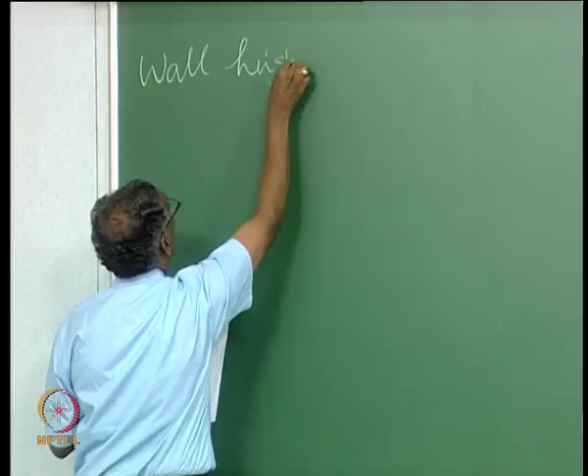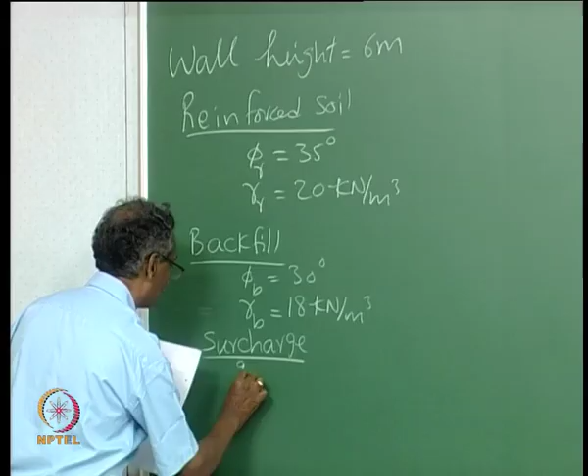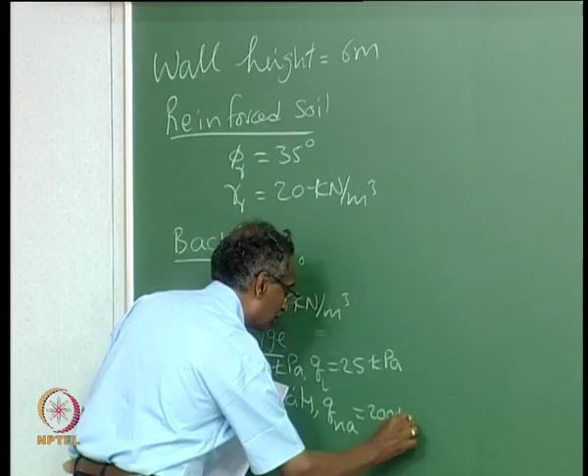Let us take a wall that is 6 meters high, and let us assume some soil properties like this: the reinforced soil has a friction angle of 35 degrees and unit weight of 20 kilonewtons per cubic meter, and the backfill has a friction angle of 30 degrees and unit weight of 18 kilonewtons per cubic meter.

The permanent surcharge or dead load surcharge is 15 kPa, and the live load surcharge is 25 kPa. Let us assume that the foundation soil has an allowable bearing pressure QNA of 200 kPa, and let us now go through some designs.

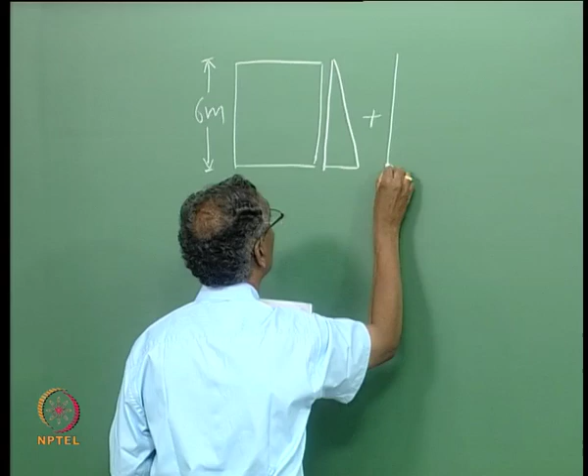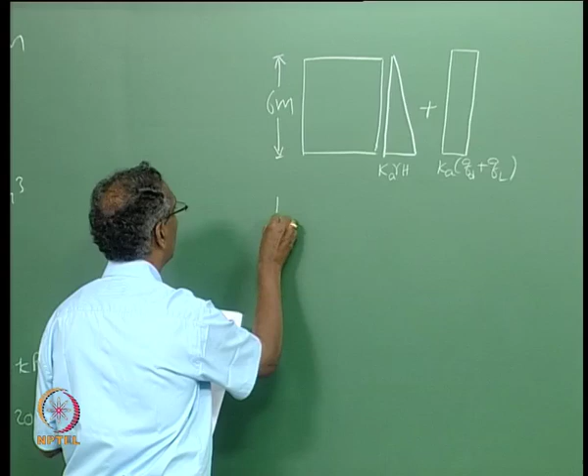As we have seen in the previous lectures, the effect of self weight is a triangular pressure distribution, that is Ka times gamma h, maximum at the bottom of the wall. The effect of surcharge loading is constant, giving a rectangular pressure distribution, and our Kab is 1 minus sin phi b by 1 plus sin phi b, which comes out as 1/3.

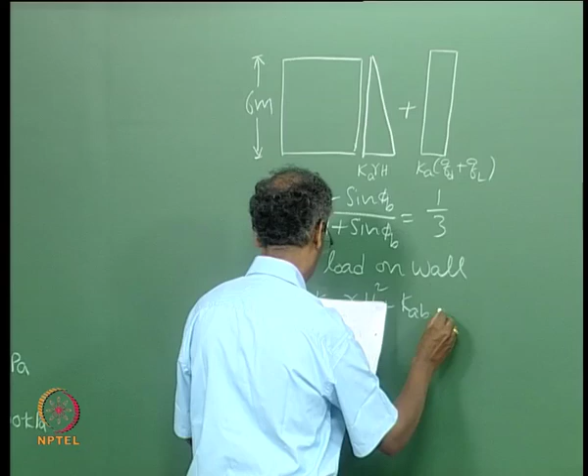So our active load on the wall PA is 1/2... and let us also include a lateral load acting at the top of the wall, which could be from a crash barrier. Let us assume that load is 25 kilonewtons per meter length. So our load is like this.

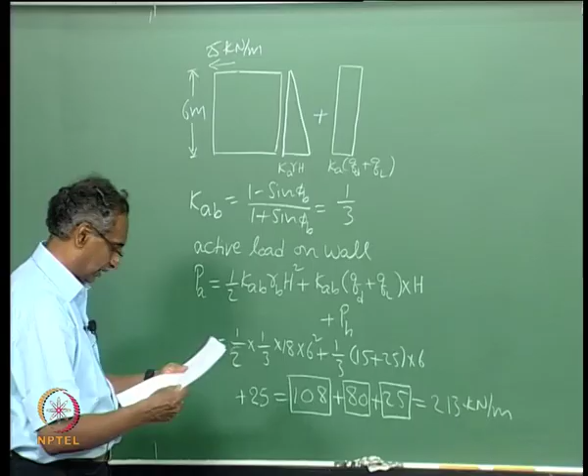So the lateral load on the wall because of the self weight of the soil is 108 kilonewtons per meter, and because of the dead load and live load surcharge is 80, and because of the traction forces we have 25 kilonewtons per meter. The net total of this is 213 kilonewtons per meter.

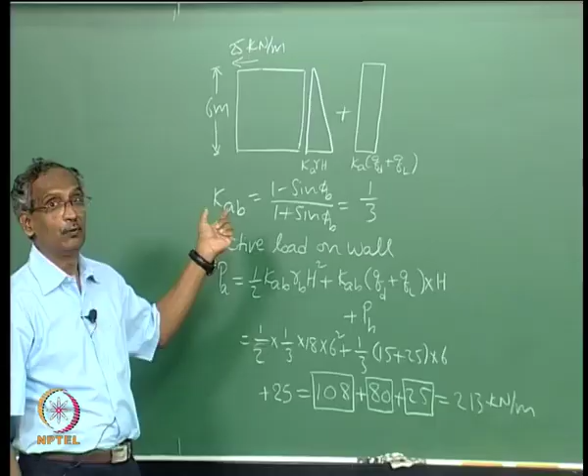Let us calculate the overturning moment. As we have seen, the self weight loading acts at a height of 1/3 of the wall height, whereas the uniform surcharge acts at a height of h by 2.

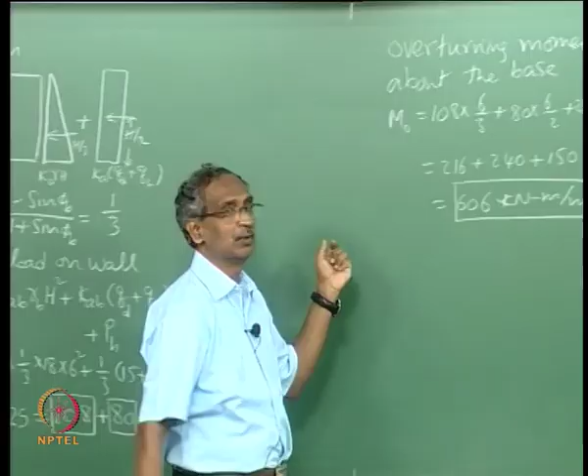So we can calculate the overturning moment as 108 times 6 by 3, plus 80 times 6 by 2, plus 25 times 6. So our overturning moment comes out as 606 kilonewton-meter per meter length of the wall, and the lateral force is 213 kilonewtons per meter.

Now the length of the reinforced block should be sufficient to counteract these lateral forces and the overturning moment with sufficient factor of safety, and let us see how we can do it.

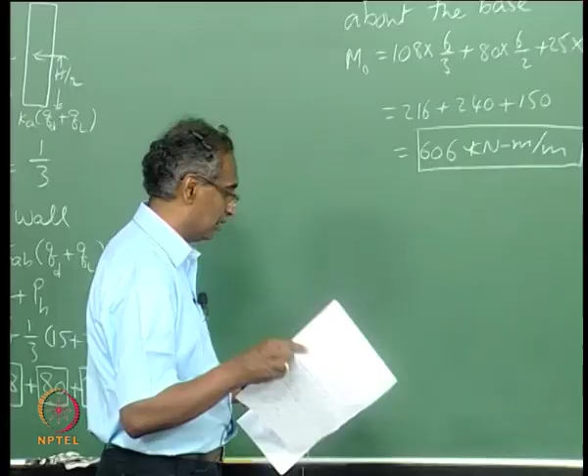It's actually a trial and error procedure, and let us start with a reinforced block length of 2/3 of the wall height, that is let us say 4 meters. Let us say that we take this length as 4 meters, and so our...

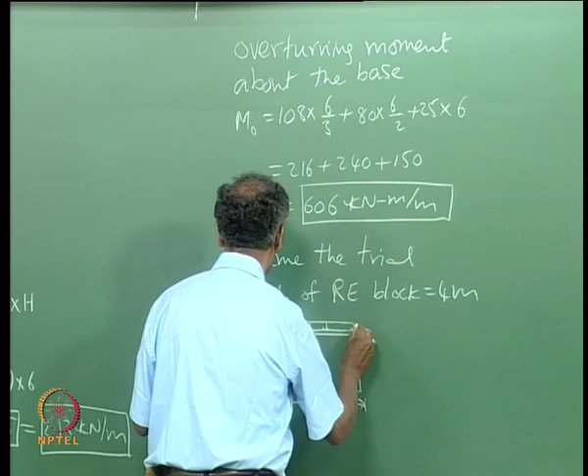For all the stability calculations we include the permanently acting loads, like for example here the dead load surcharge is 15 kPa, which we take as part of our stabilizing forces.

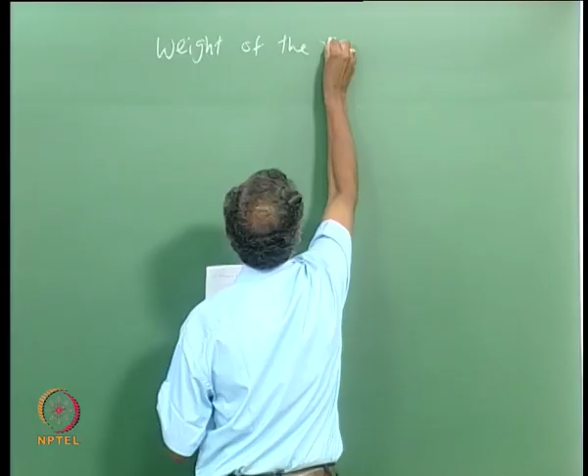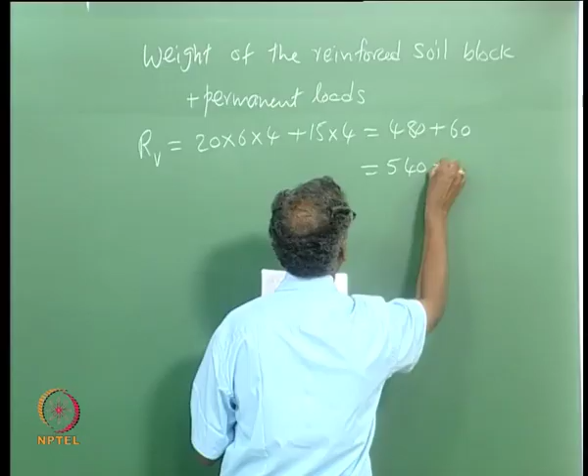So the weight of the reinforced block... the total vertical force is the sum of the weight of the reinforced soil block and the permanent loads. The unit weight of the reinforced soil fill is 20 kilonewtons per cubic meter, the height is 6 meters and the length of the block is 4 meters, and the permanent surcharge is 15 with the length of the block as 4. So our total vertical load is 540 kilonewtons per meter.

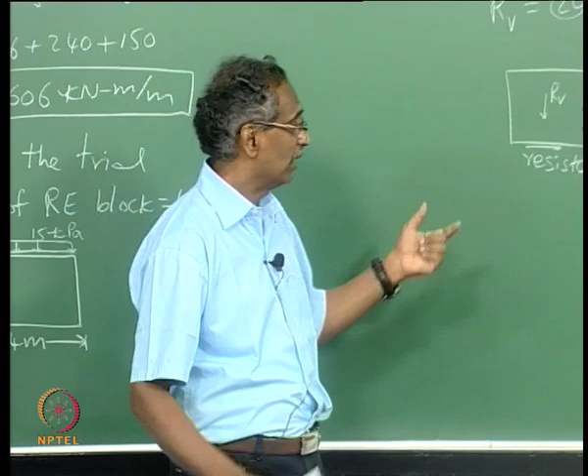Now let us estimate the shear force that is acting, so this is Pa, and the resistance. As we had discussed earlier, the resistance is either a function of the reinforced soil or the foundation soil, depending on whichever is more critical. But in this case, since we do not have data on the foundation soil, as a trial let us assume our mu, the friction factor, as tan of 2/3 of the friction angle of the reinforced fill.

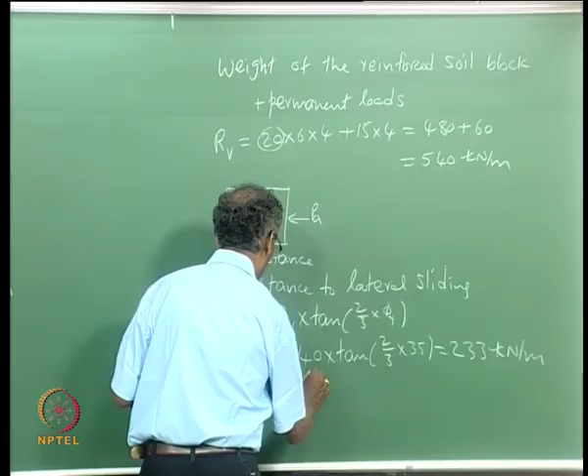So this resistance force comes out as 233 kilonewton per meter, and our factor of safety against lateral sliding is the resistance divided by the force. This factor of safety is coming out as 1.1, which is much less than 1.5. So this particular length of the reinforced block is too short, and it is not adequate to safely resist the lateral force.

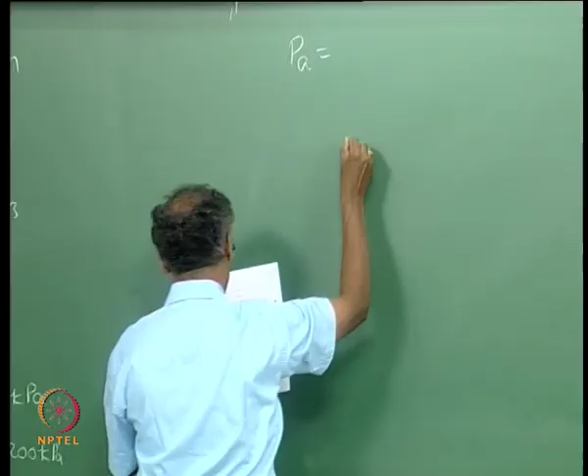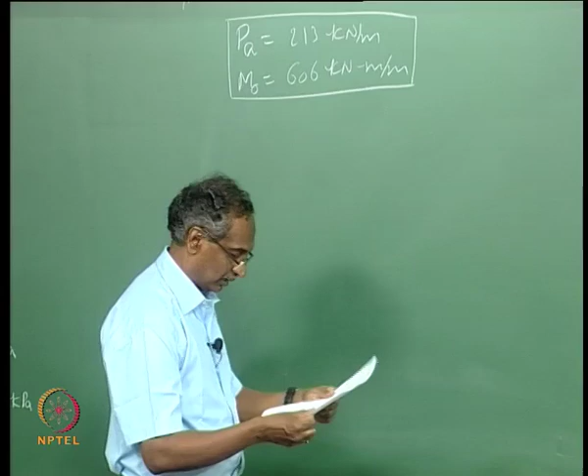So now let us increase the length to a higher value and do the calculations. Even when we increase the length of the block, because our height of the wall is constant at 6 meters, these upsetting forces will not change. Now let us write them separately, and now increase the length to 5 meters.

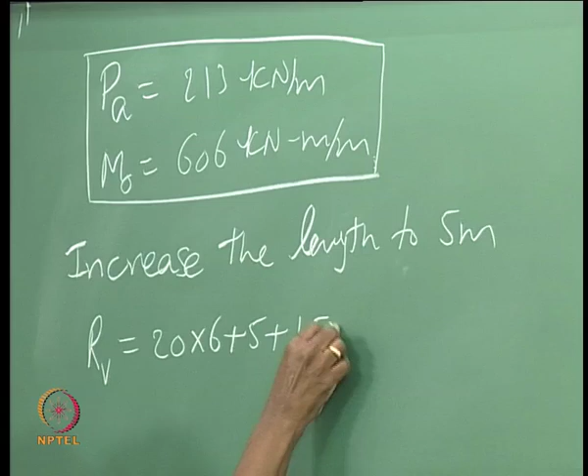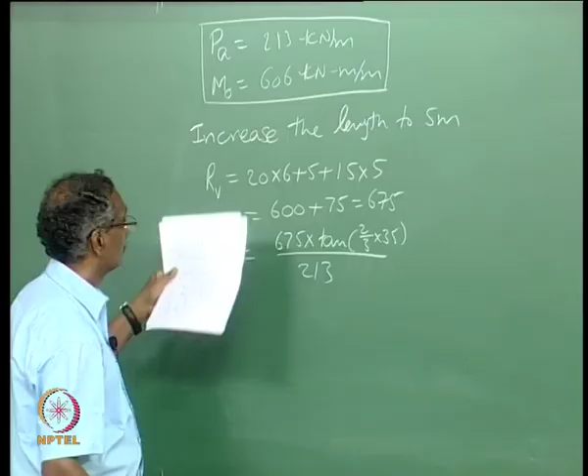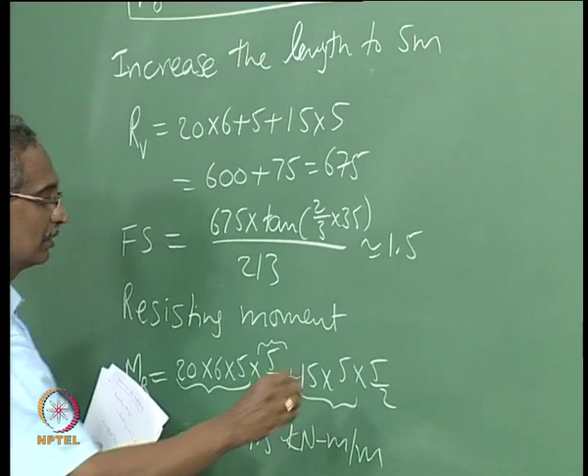So actually the resisting force is 20 times 6 times 5, where 5 is the length of the reinforced block, and this 5 by 2 is the lever arm, that is half the length of the reinforced block. And 15 times 5 is once again the resisting force, and 5 by 2 is the lever arm, and our resisting moment is 1687, and our factor of safety against overturning is 1687 divided by 606.

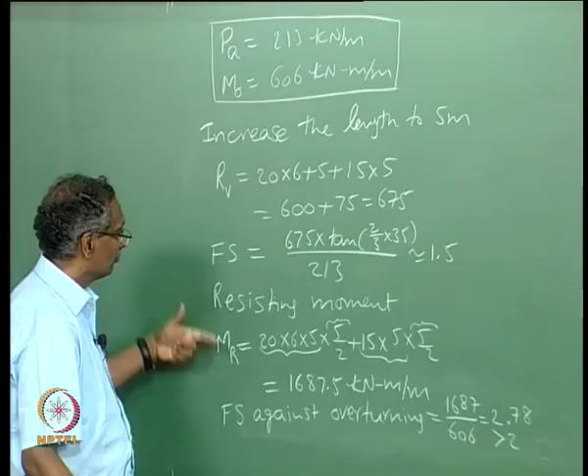And it comes out as 2.78, which is greater than 2. So this length of the reinforced block is adequate as far as resistance against lateral sliding is concerned, and also the resistance against overturning moment. Now let us calculate the bearing pressure.

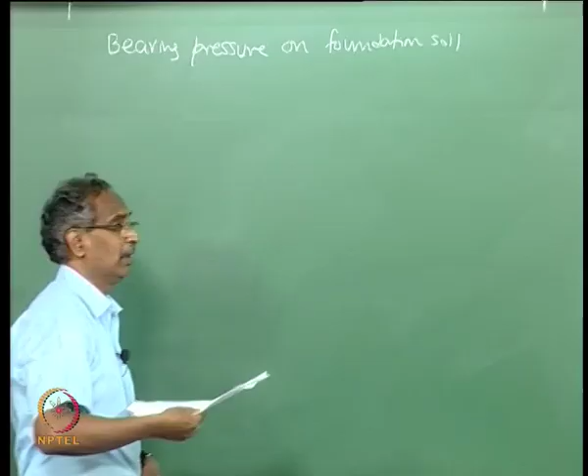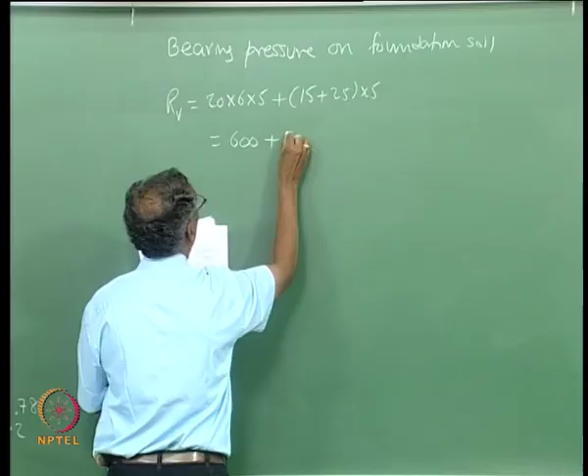And for calculating the bearing pressure, we include all the loads that are acting, including the live loads and the permanent loads and so on. So our RV in this case is 20 times 6 times 5 plus 15 plus 25 times 5, that is 600 plus 200, 800 kilonewtons per meter.

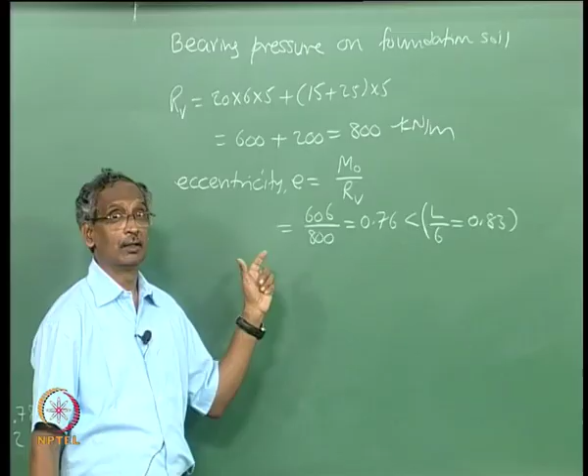And our eccentricity is m naught by RV, that is 606 divided by 800, that comes out as 0.76, and this is less than L by 6, that is 0.83. So actually our eccentricity should be within the middle third in the case of soils, and within 1/4 of the length in the case of rock foundations. So in this case our eccentricity is 0.76, which is less than 0.83.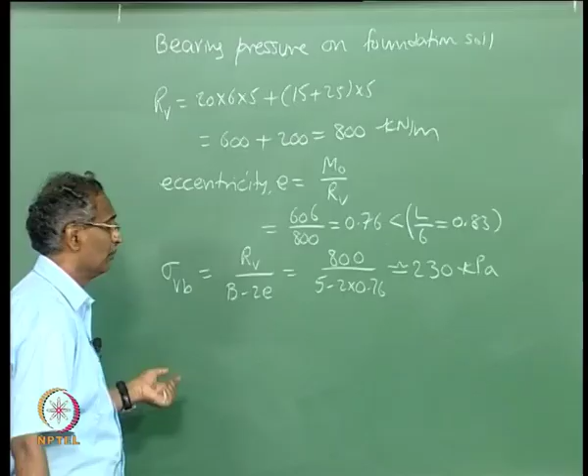So it is okay, and our sigma Vb is Rv by B minus 2E, that is 800 by... this comes to a bearing pressure of almost 230 kilopascals, which is more than the allowable bearing pressure of 200. So we will have to once again revise the length, so that our bearing pressure is also less than the bearing capacity. So now let us increase the length of the reinforced block to 6 meters.

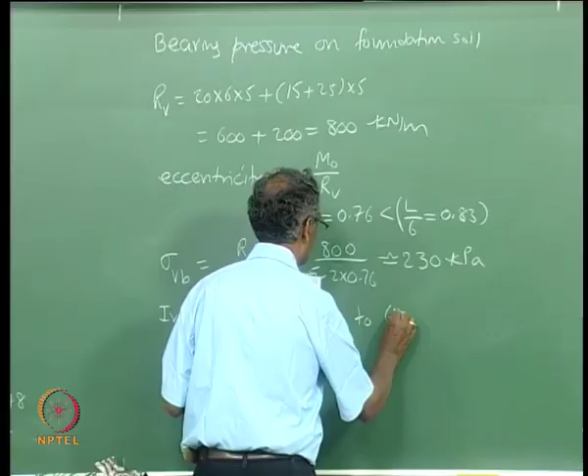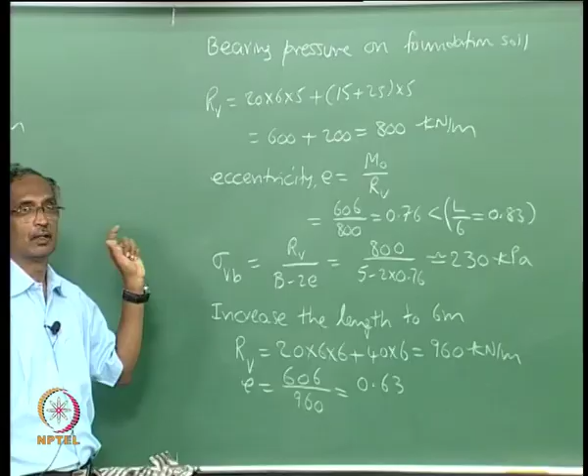So our RV comes to... So actually you notice that our eccentricity now is only 0.63 as compared to 0.76 when our reinforced block length was 5 meters, and that is because our overturning moment is remaining constant, the overturning moment of 606, whereas the weight of the reinforced block is increasing when we increase the length. So this is one way in which we can increase the stabilizing forces by increasing the length of the reinforcement.

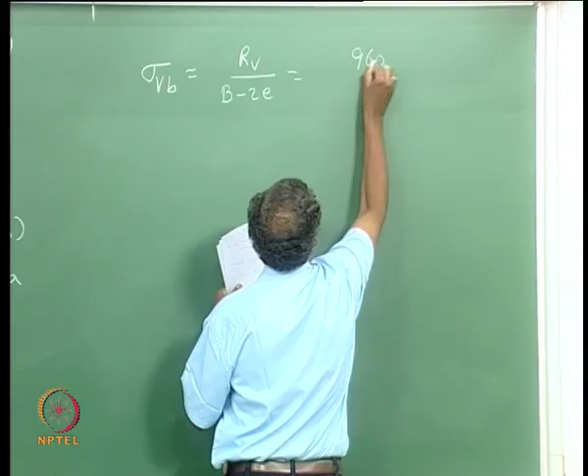So our eccentricity is now reduced to 0.63 and our sigma Vb is... so this bearing pressure comes to 202 kilopascals, which is very close to 200 kPa.

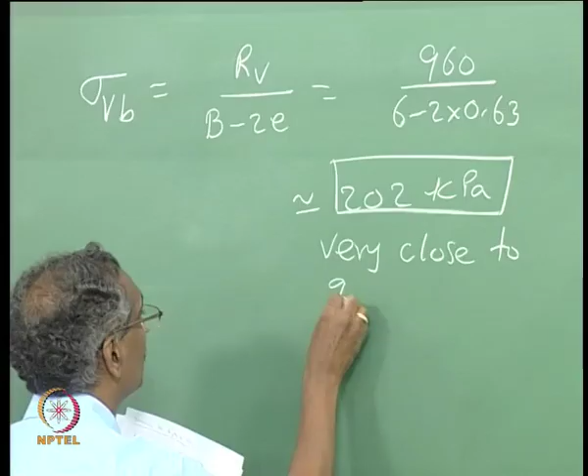So, we can just leave it like that, the 6 meters length of the reinforced block for this particular case, and this 6 meters length will satisfy all the requirements of the factor of safety against sliding. The factor of safety against sliding, and then the overturning, bearing capacity,

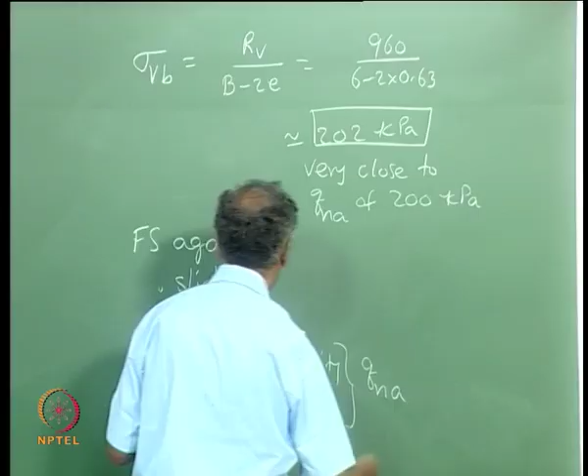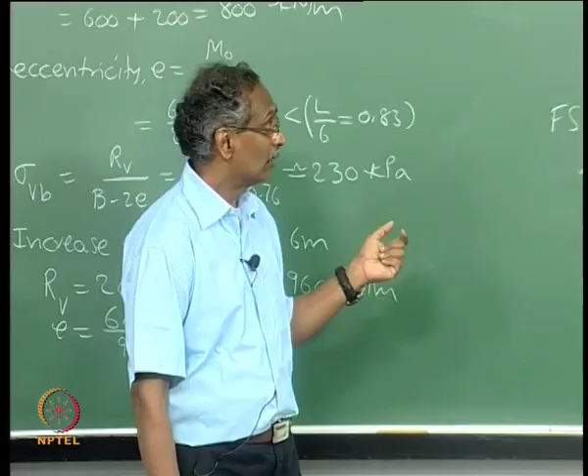and then the settlements. The factor of safety against sliding should be greater than 1.5 and the factor of safety against overturning should be greater than 2, and in this case we have achieved more than that, because our length of the reinforced block is increased just to satisfy the bearing pressure. So, our factor of safety against sliding would have gone up much beyond 1.5 and the overturning factor of safety would have gone to much more than 2, because our eccentricity has become very small, and the factor of safety against the bearing capacity and the settlements is satisfied by making sure that our bearing pressure is less than the allowable bearing pressure, that is the QNA.

So, this length of the reinforced block of 6 meters satisfies all the requirements from our design considerations. Okay. So, this completes the external stability analysis of this particular retaining wall, and the next step is to calculate the reinforcement spacing, that we will see in some other lecture, but let us slightly modify the problem with a sloped backfill and do the calculations.

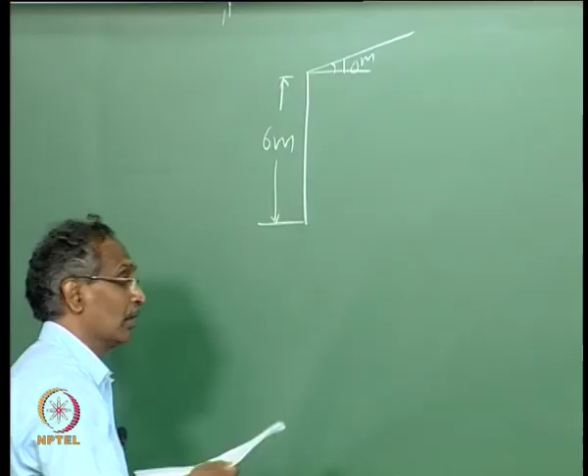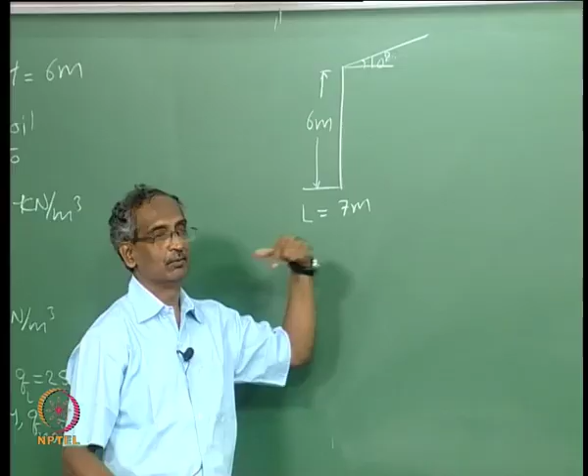Now, our backfill, let us say that it has a slope of 10 degrees, and let us assume the trial length as 7 meters, because we have earlier seen that we require 6 meters of length to satisfy all the requirements, and this wall as it has a backfill slope, let us assume slightly higher length of 7 meters, and so our reinforced block has 7 meters length like this,

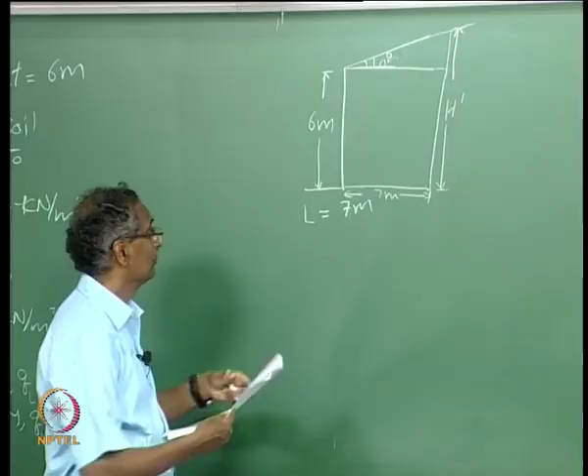and our H prime now, the height of the soil that our reinforced block should support is H prime, and our H prime is 6 plus 7 times tan 10 degrees, that is, and let us use the simple Rankine's formula for calculating the lateral earth pressures.

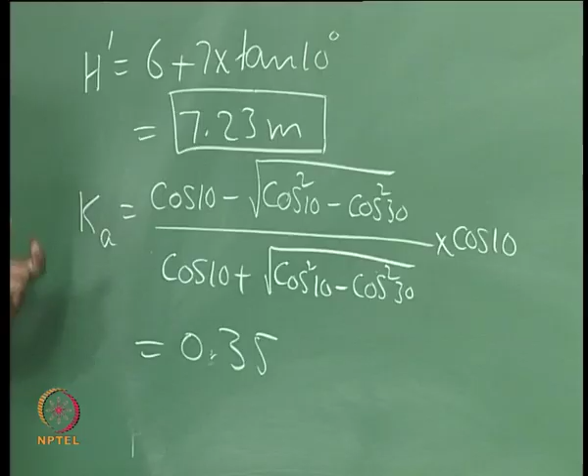So, if you apply the Rankine's formula, the Ka comes out as 0.35. In the earlier case, it was only 1/3, that is 0.33. In this case, because of the backfill slope, we have slightly higher lateral earth pressure constant. And now let us calculate the Pa as 1/2

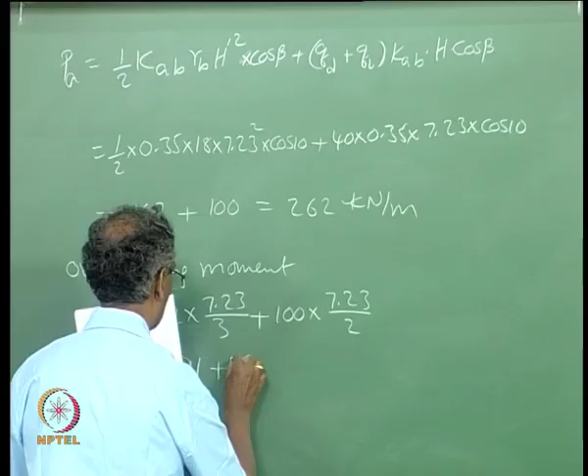So, this lateral force because of the self weight of the soil comes out as approximately 162, and the lateral force because of the live load and the dead load surcharge comes to nearly 100. So, the total lateral force is 262, and then the overturning moment m naught is 162 times... so our overturning moment now is 751, and if you compare this to the earlier one of 606, this is much higher, mainly because we have a sloping backfill.

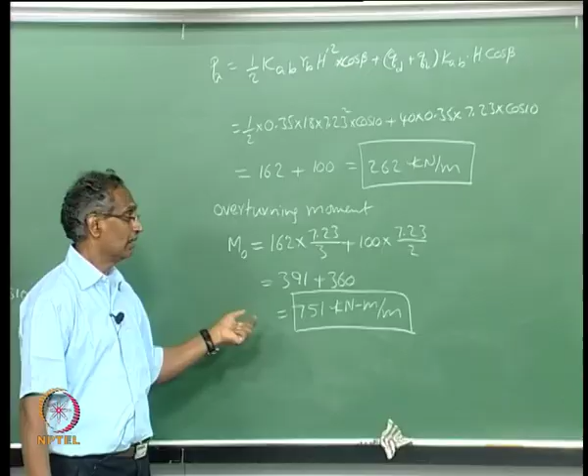So, because of that our K is high, and then the effective height of the soil that we need to support is much higher. Previously it was only 6 meters, now we need to support a height of 7 meters, 7.2 meters to be very precise.

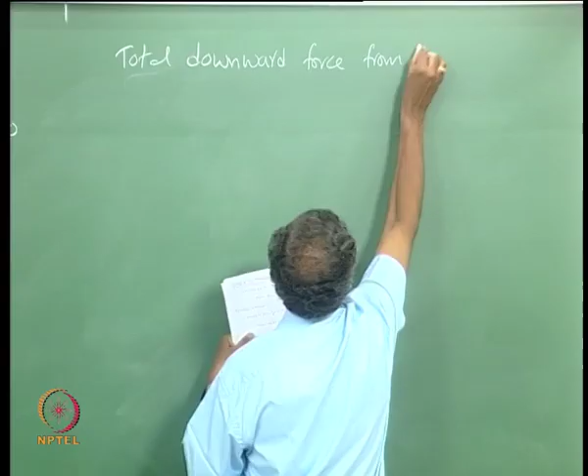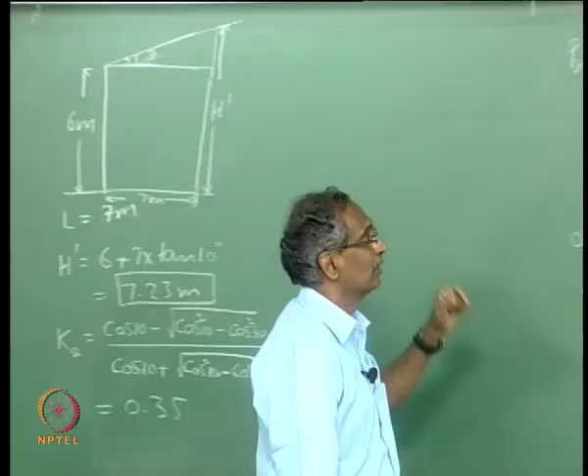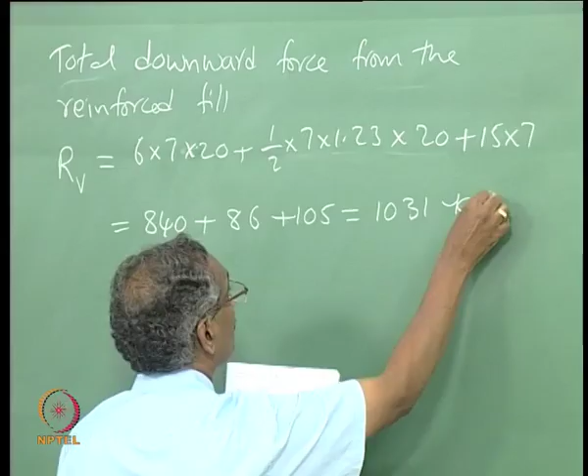So, now let us do the stability calculations. So, the total downward force is because of this rectangular portion plus the weight of the soil within that triangle, and then the permanent surcharge that is acting on top of the slope, and this force is the total downward force. So, it is 6 times 7 times 20 plus, and this comes out as 840 plus 86 plus 105, that is this total downward force is 1031 kilonewton per meter.

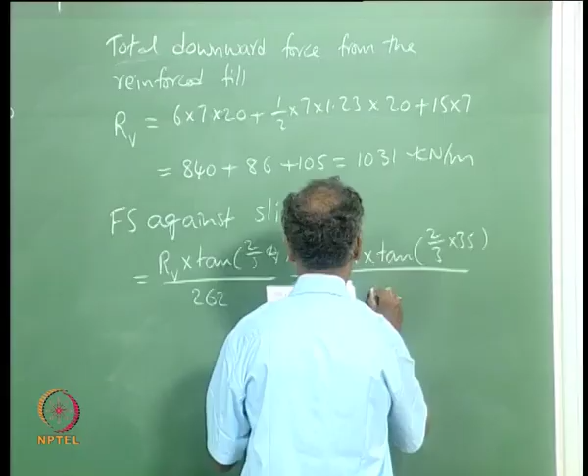The factor of safety against sliding... so, our factor of safety against sliding comes out as 1.7, which is more than 1.5. So, this length of the block is sufficient as far as the factor of safety against lateral sliding is concerned.

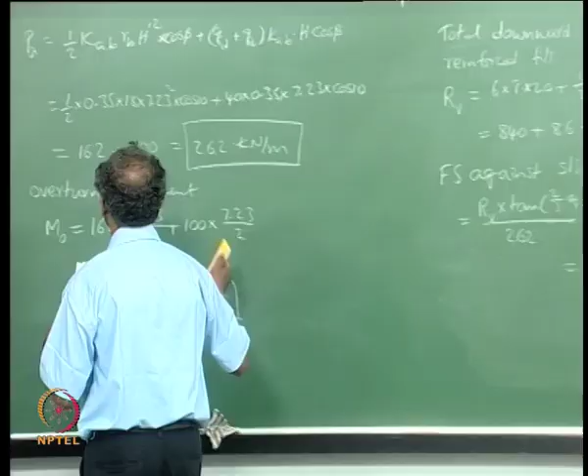And now, similarly, let us calculate the factor of safety against overturning. So, we have already calculated our PA as 262 and our overturning moment as 751.

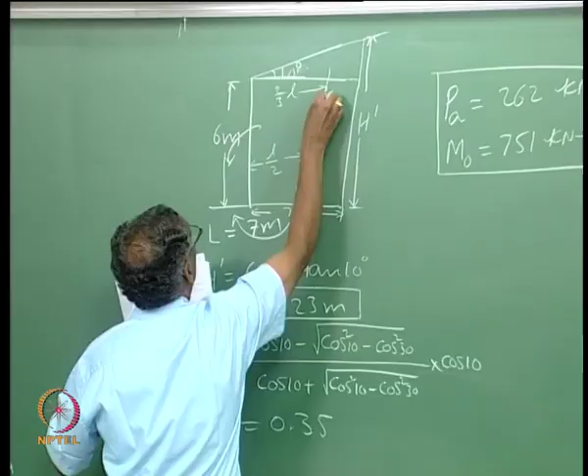See here our overturning moment is acting in this direction, the resisting moment is acting in this direction, and the lever arm for the rectangular portion is this, and the lever arm for this triangular portion is 2 by 3L. So, because of that we have taken 2/3 of the 7, and so the total resisting moment comes out as 2940 plus 402 plus 368.

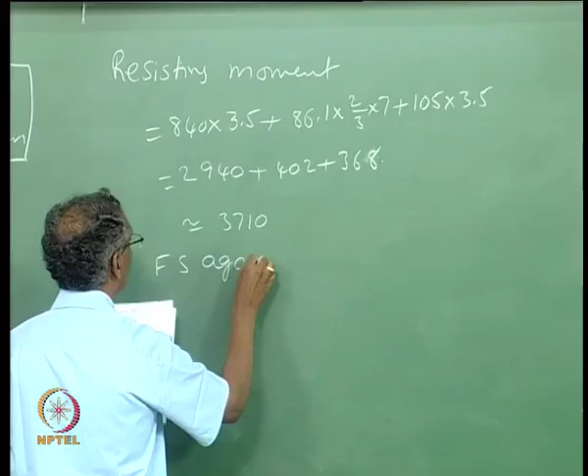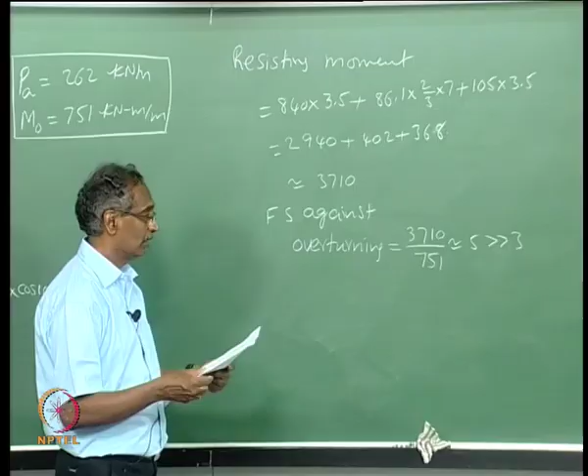The factor of safety, this factor of safety against overturning comes out as much more than 3, it comes out as 5, which is much higher than 3. So, this length of the reinforcement is adequate, and now let us calculate the bearing pressure.

And for this we need to include the effect of the dead load also. So, let us calculate the total force once again.

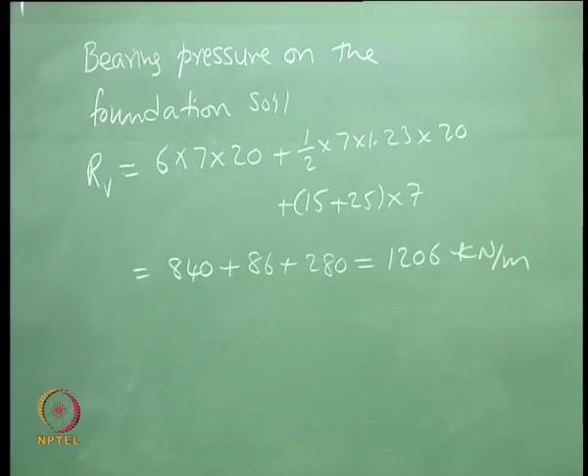By including the effect of the dead load and the live load, our total downward force increases to 1206, and our eccentricity is M naught by R v, which comes out as 0.63, which is less than L by 6. So this is okay, and our bearing pressure...

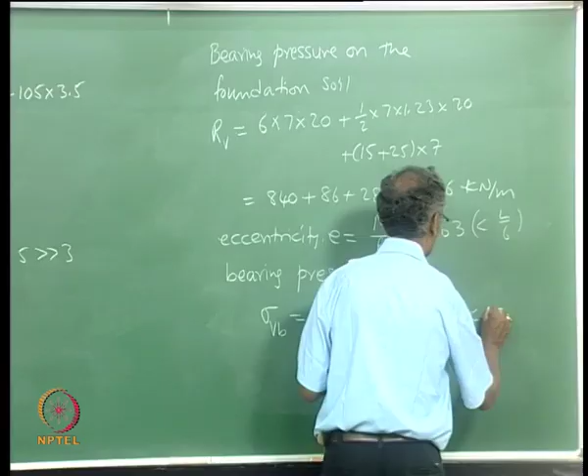Our bearing pressure after all these calculations comes out as 210, which is higher than the allowable bearing pressure of 200. So we will have to increase the length of the reinforcement section.

When we increase the length, we increase in some convenient numbers, because we cannot increase by just 5 or 10 centimeters, as it becomes very difficult to cut the reinforcement to odd lengths, especially when you have geogrids with specific aperture openings. It may not be possible to cut at odd places through the apertures, so normally we increase the length of the reinforcement block in increments of 250 mm.

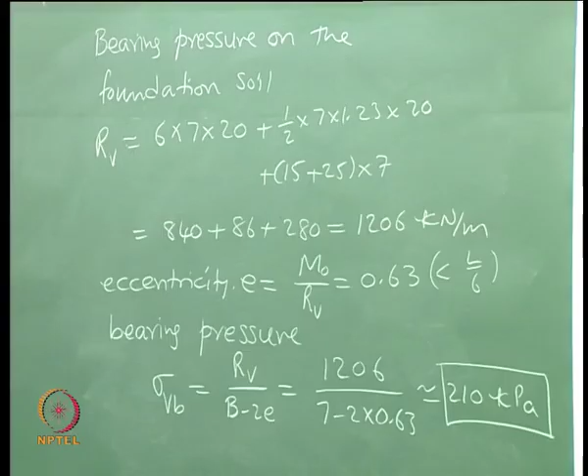In this particular case, a length of reinforced block of 7.5 meters satisfies the bearing pressure requirement also. I am not showing that calculation, but you can follow similar calculations by substituting 7.5 in place of a length of 7 meters, and we will see that the bearing pressure comes out as less than 200. So a length of 7.5 meters satisfies all our requirements, the factor of safety requirements.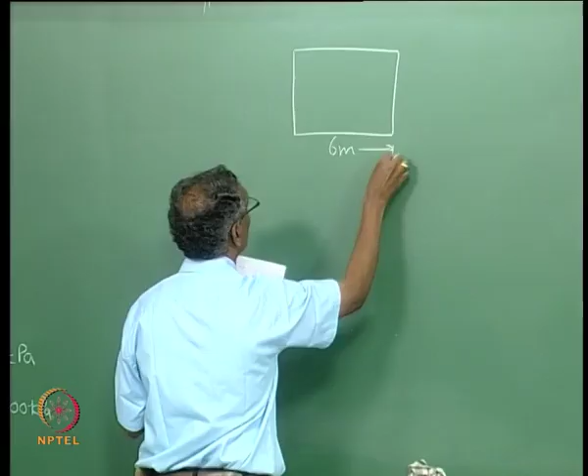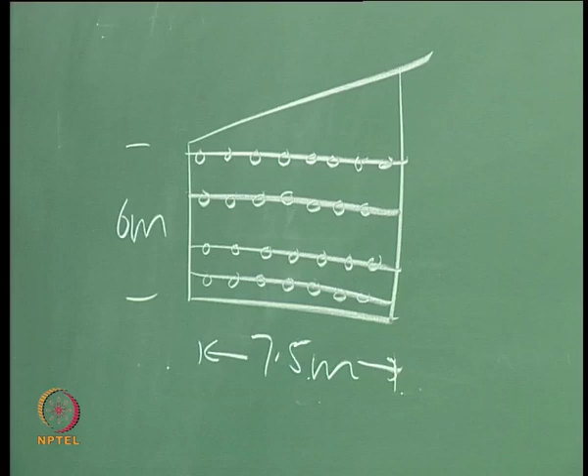So we have seen that if you have a horizontal fill, we require a reinforced block length of 6 meters. And if you have a sloped fill, we require a block length of 7.5 meters, which is more than that we have for a horizontal backfill.

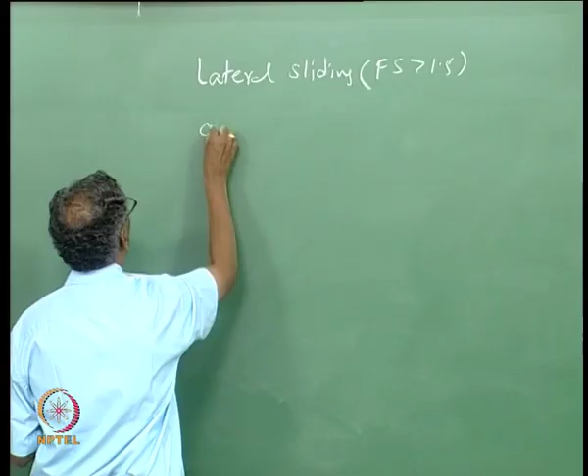In this particular example, we have checked for safety against lateral sliding, greater than 1.5; overturning, factor of safety greater than 2; and then the bearing pressure.

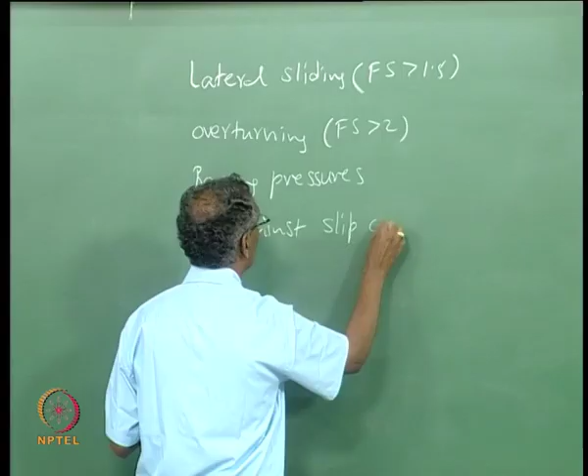So the remaining calculation is the overall factor of safety, or the factor of safety against a slip circle failure. That is, we consider a number of slip circles passing through the foundation soil, either through the toe or anywhere in general, and make sure that the factor of safety that we get through the slip circle analysis should be at least greater than 1.3 for moderate...

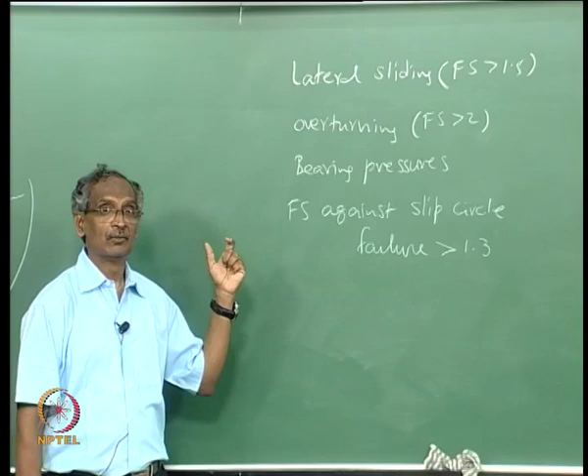Factor of safety. And if it is a very important structure, the factor of safety that we need to get through the slip circle analysis should be at least greater than 1.5.

Actually, in this particular example that we have considered, the reinforced block length has come out as very high. Usually, the length of the block that we require is about 2/3 to 3/4 of the wall height. But in this case, because our foundation soil has relatively less bearing capacity, that is 200 kPa, our block length is 6 meters in the first case, almost equal to the height of the wall, and in the second case the length is 7.5 meters, once again almost equal to the effective height of the wall.

At the back end of the reinforced block, the calculations are reasonably simple, but what we actually do is write a small Excel spreadsheet, because all these calculations are repetitive in nature, and we need to repeatedly revise the calculations, especially for a sloped fill like this. Whenever you revise the length of the block, the height of the soil also changes, and because of that our upsetting forces increase.

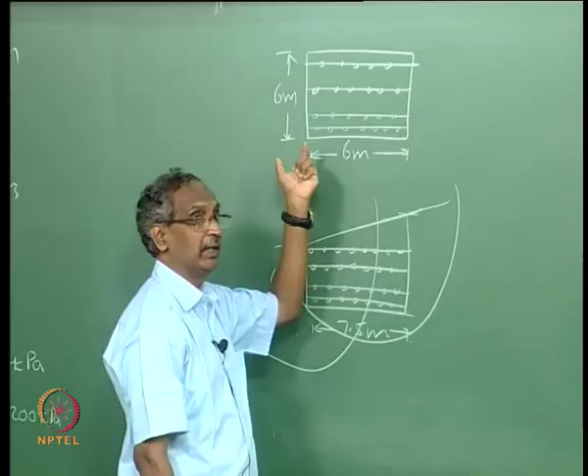So the next step in the design calculations is how do we decide the vertical spacing of the different reinforcement layers, and then what type of reinforcement do we provide, what should be the strength, and what should be the type, whether it should be a polymeric geosynthetic, or steel strips, or a steel mesh type thing, then what should be the facing, and other factors. We will consider these in some other lecture, because of lack of time in this particular lecture.